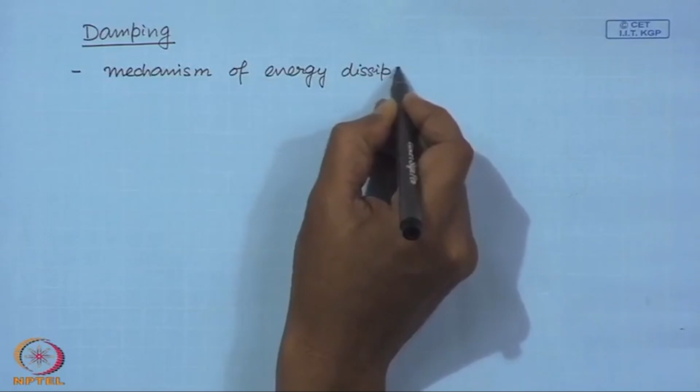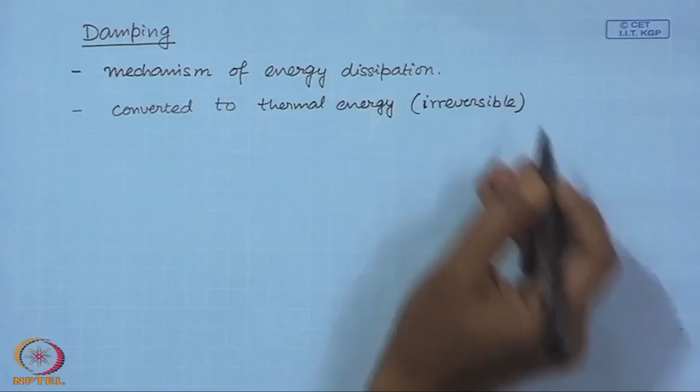So first, this damping is a mechanism of energy dissipation. Now what happens to this energy that is dissipated? It gets converted to thermal energy, and this conversion of mechanical energy to thermal energy in these cases is an irreversible process.

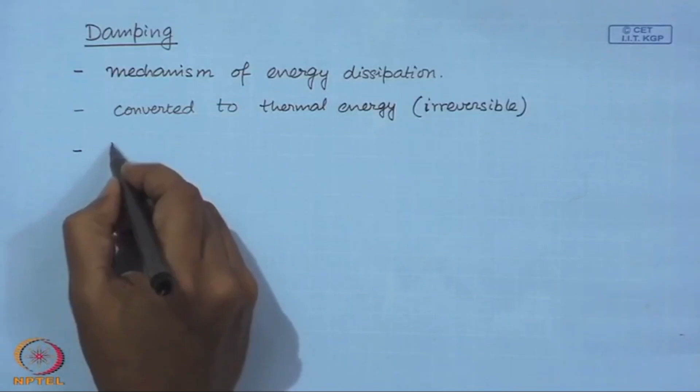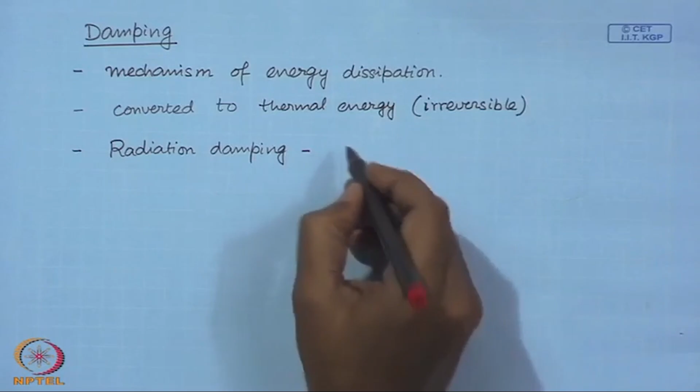Now most of the damping mechanisms work on this, but there is an exception which is known as radiation damping. This damping mechanism, this draining of energy of the structure by radiation damping, takes place not by conversion to thermal energy, but by radiation of the energy in form of sound in the fluid medium in which the structure is placed, for example air or water or any other liquid.

Or sometimes even from the support points of the structure. So wherever the structure is supported, no support is ideal, that means no support is rigid, so there will be some flexibility, and continuously energy gets radiated out at the support points. So we have primarily this energy dissipation by conversion to thermal energy, but there is another mechanism in which it might also be converted or radiated out of the structure.

Now what are the sources of damping? The first is known as internal friction or internal damping. Whenever a structure is vibrating, between the layers of the structure, molecular layers, there is differential straining, these layers have differential motion, and that dissipates energy.

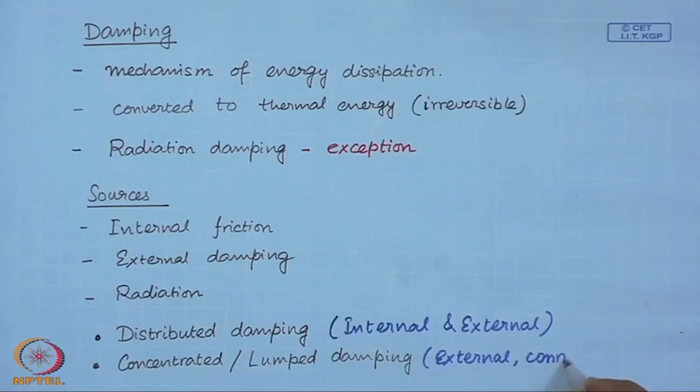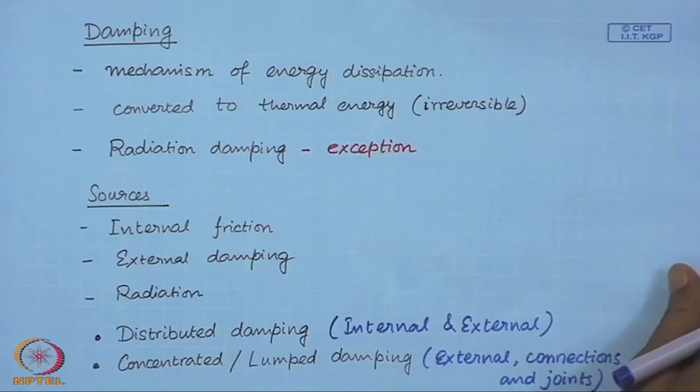So this typically occurs when we have, let us say, a Stockbridge damper in high tension cables. That is a concentrated or lumped damping, which is an external damping, and it can happen at connections and joints, say for example riveted connections, etc. So we have these two kinds of damping. Let us begin with distributed damping.

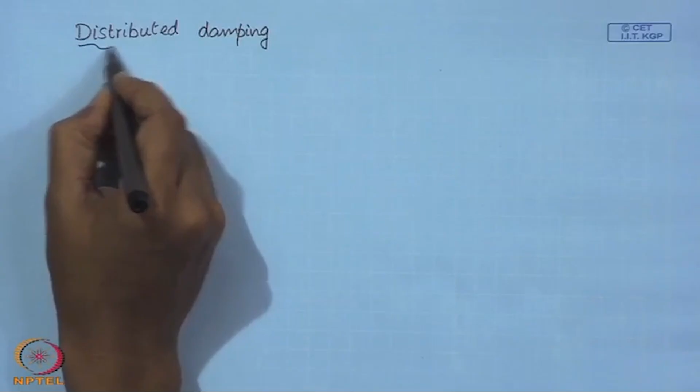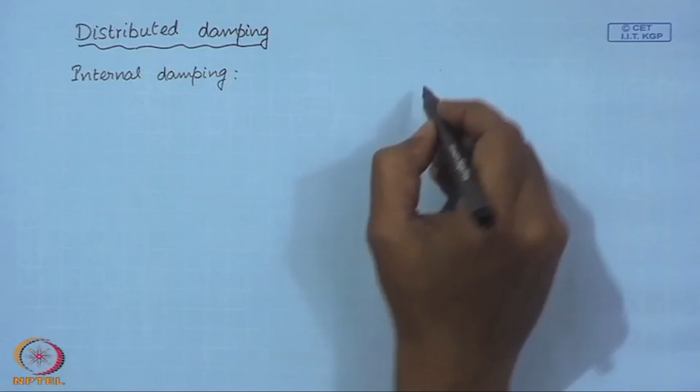So let us try to model this internal distributed damping first. Here we are going to discuss a phenomenological model for internal damping, for example, in a bar, in axial vibration.

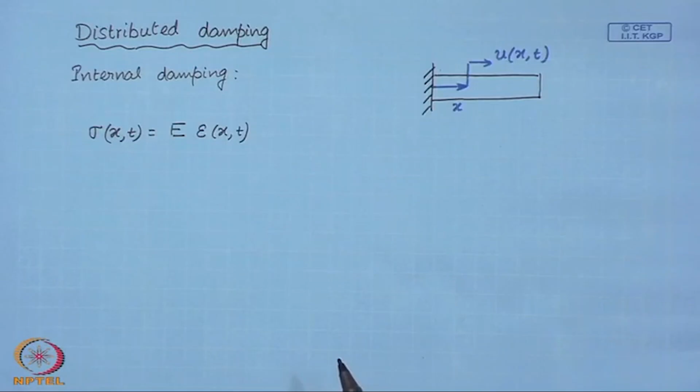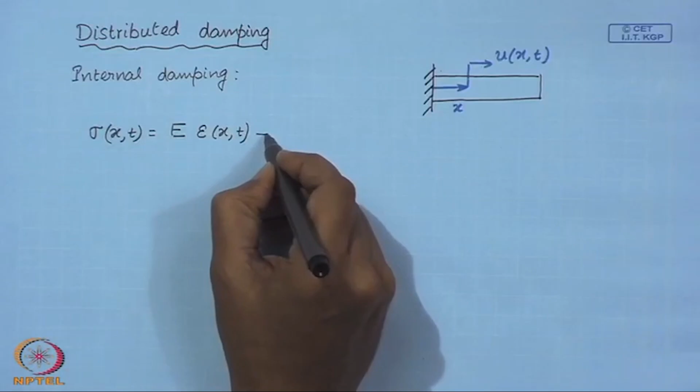Now, when we derived the equation of motion of such a bar, we considered this constitutive relation like this. As I mentioned, in order to model internal damping for a one dimensional system, we must somehow consider the rate at which this straining is taking place. So, we modify our constitutive relation to include the strain rate.

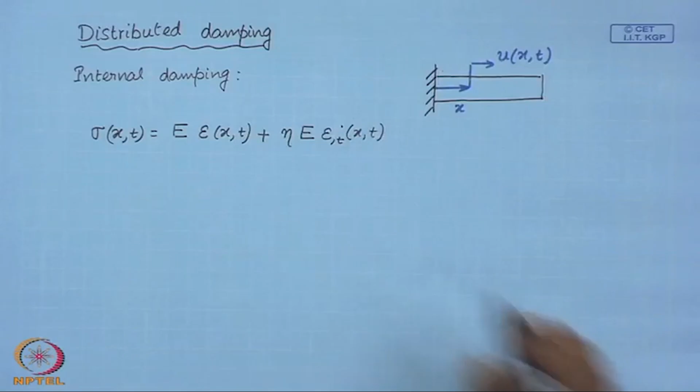Now, this factor is known as the loss factor, and the product of these two terms may be represented as d I, the coefficient of internal damping. So, what we have done is we have introduced in our constitutive relation this additional term, which we will see how this works as internal damping.

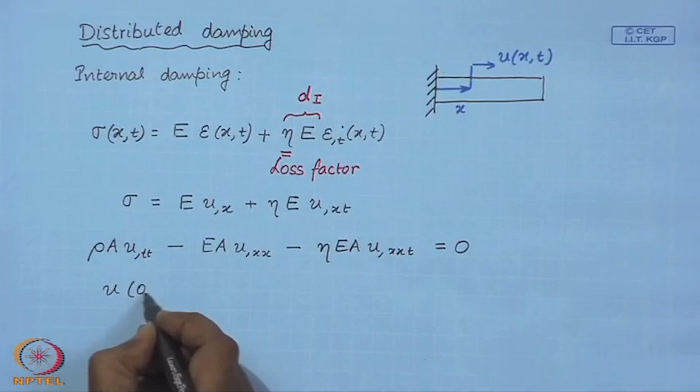So, therefore, our stress is given by this. Now, when we use this to derive the equation of motion as we have done before, we consider uniform cross sectional area. This term, E times del u del x, gives this term, therefore this term will give us, along with the boundary conditions, this.

So this is the damping term. We have obtained this term by introducing this additional strain rate term in our constitutive relation. Now, similarly with external damping, external distributed damping, we have a term like this, and together with internal and external damping, we have this equation of damped vibration of a bar, of a uniform bar.

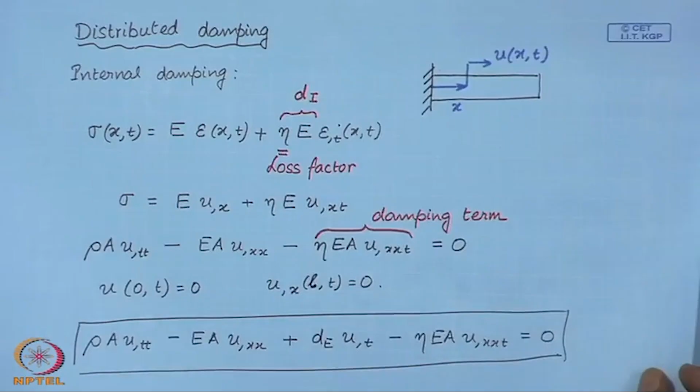Now, this equation may be written in a compact form like this, where this damping operator, this is known as the damping operator, just like this K is known as the stiffness operator.

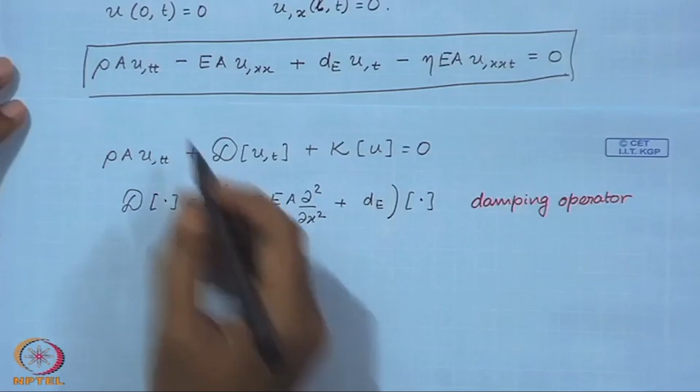Now, let us first see that these terms that we have considered, they indeed lead to dissipation of energy, because as yet we have just introduced these terms and have not checked whether they really lead to dissipation of energy. So, let us start with this equation of motion, and as is the usual way to obtain the energy equation, we multiply this whole equation with the velocity and integrate over the domain of the bar.

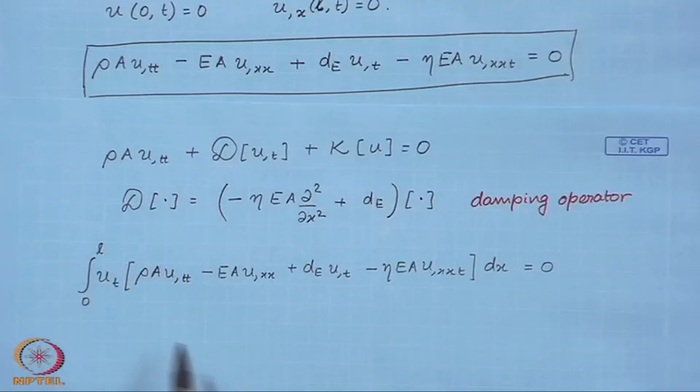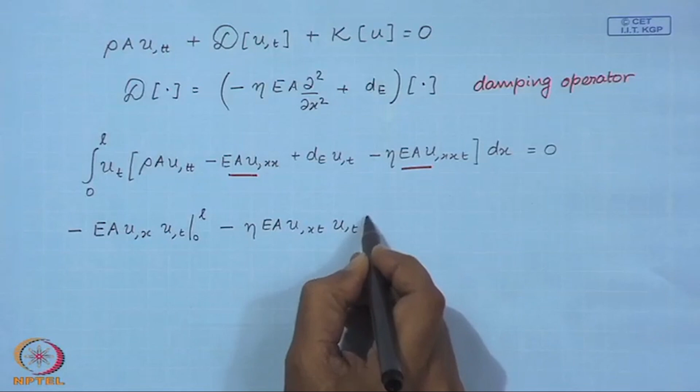And this must be 0. So, multiply by velocity and integrate over the domain of the bar. Now, these two terms I will integrate by parts with respect to the space. So, what I obtain, and this term I can write as can be easily checked. So, this first term can be written like this, and this term.

Now there will be a space derivative of this term, and similarly. Now, if you use the boundary conditions that we have, then these boundary terms drop out, because at x equal to 0 the velocity is 0, at x equal to L there is a force free condition. So this is 0, similarly this is also 0. So, what we are left with is this integral. Here again I can write this term, and I can write this also as a time derivative. The time derivative I have taken out, and I will take the other terms on the right hand side.

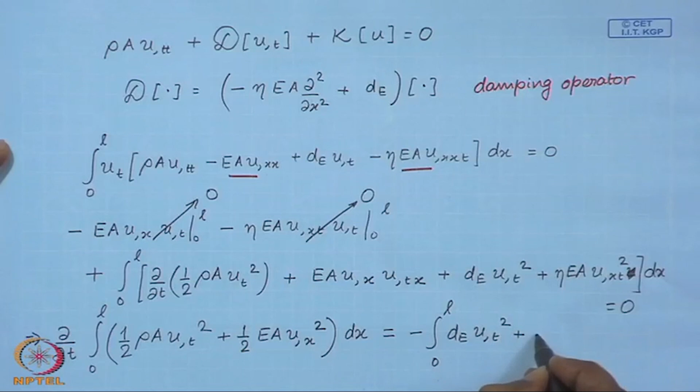So, on the right hand side we have an integral which is always positive provided d E is positive. So, if this d E is positive and eta is positive, then this integral is positive. Here there is a negative sign, so the right hand side is always negative. Which means this is always less than 0 provided d E is greater than 0 and eta is also greater than 0.

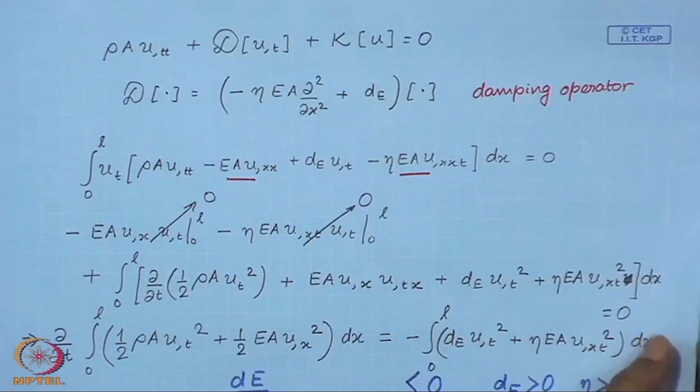Now, this is nothing but the total mechanical energy of the bar. This is the kinetic energy, this is the potential energy, we have already seen these terms. So, the rate of change of energy is always negative, which means energy always dissipates or drains out of the system. The mechanical energy is always dissipated by these damping terms that we have considered, these two terms. So, this shows how the energy dissipates with time.

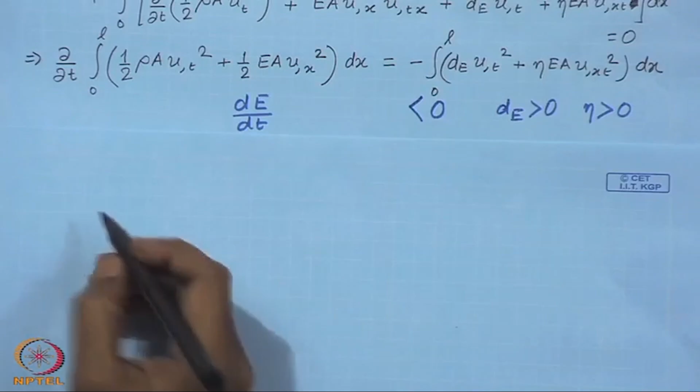Now, if you integrate, suppose you have forcing. In that case this energy equation, I will write as dE/dt, and suppose in addition you have forcing. This additional term would come because of external forcing.

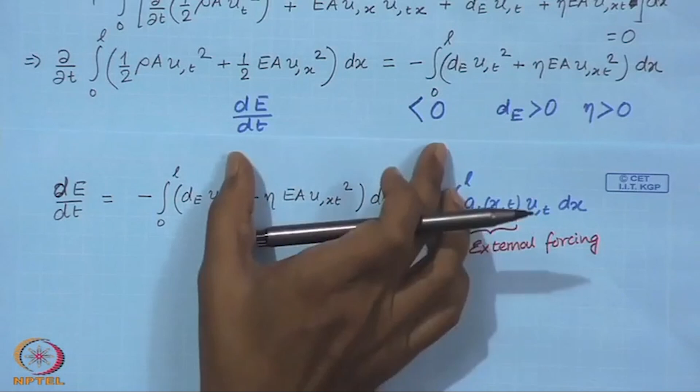Now, suppose this forcing is something like this harmonic forcing that we have considered. We know already, we have discussed this, that there is a steady state solution, and because of this damping, as we have seen here, all the energy of the initial disturbance must dissipate or drain out of the system. So, what we are left with is the steady state solution. Any initial condition, any disturbance created because of an initial condition must dissipate out, as we know from here. So, if we have the harmonic forcing, what will remain at sufficiently large times is the particular solution, which is generated only because of this external forcing.

So from here you can estimate what happens at steady state. At steady state the motion is periodic, therefore if I integrate this energy equation over one period, the change of energy must be 0. So, therefore, I can write this, here I am assuming that this forcing is periodic or harmonic. Now at steady state, if there is a steady state solution, then the energy change over one period must be 0.

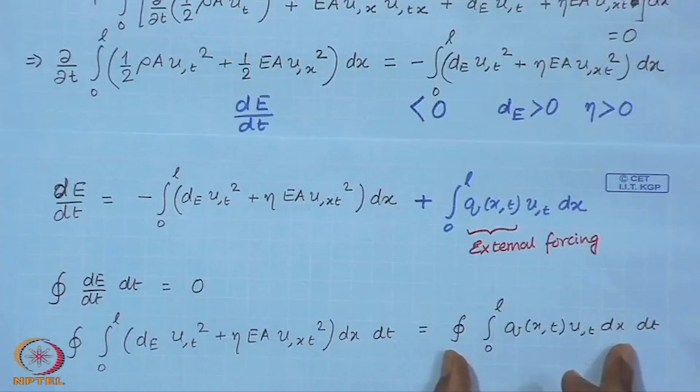Therefore, this is what we obtain. So what this says is the energy provided by the forcing over one cycle is equal to the energy dissipated by the damping terms over one cycle. So from here you can estimate many things, for example, you can estimate the damping.

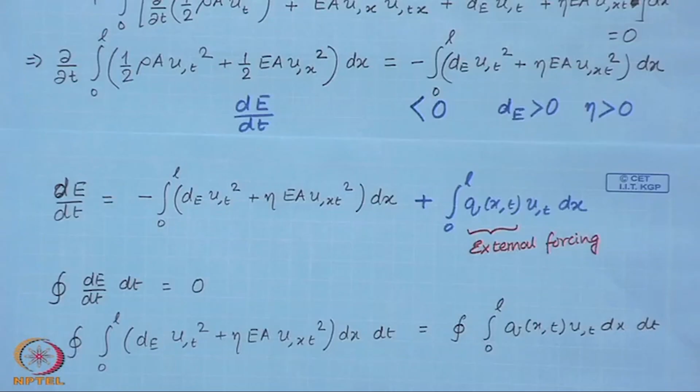Suppose you give a harmonic input and you record the amount of energy that you are supplying over one period, then you know how much energy is being dissipated. So you calculate this term and that will give you an estimate of energy dissipated by the damping mechanism in the system.

So what we have concluded is that any initial condition or any initial disturbance must die out because of these damping terms, and what remains is the steady state solution, and that can be used to estimate the energy that is dissipated, and that can be used to model the internal dissipation, as well as you can estimate the amplitude of motion in certain cases.

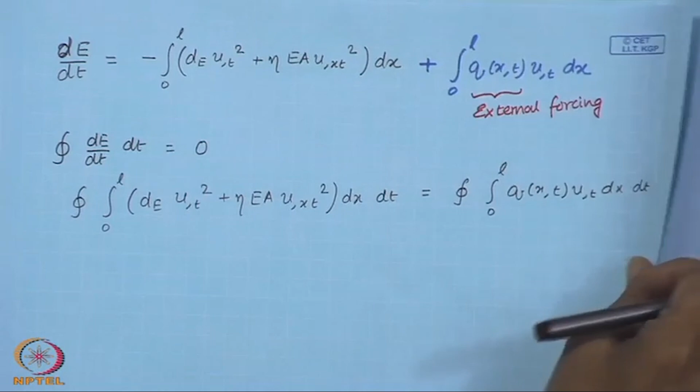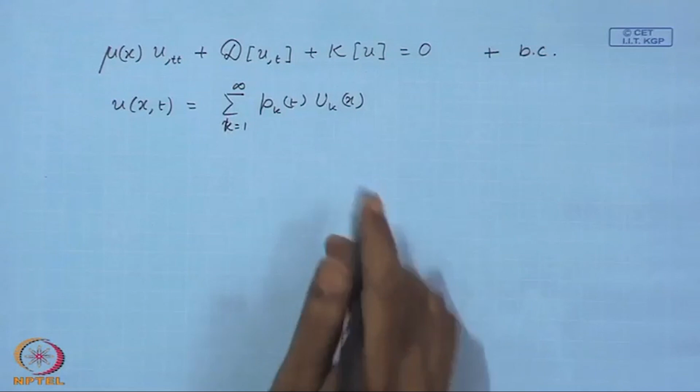Now let us once again look at this damped system with certain boundary conditions. Along with certain boundary conditions, let us try to find out the solution, or let us discretize this system as we have done before using the modal expansion. So these are the eigenfunctions of the undamped eigenvalue problem.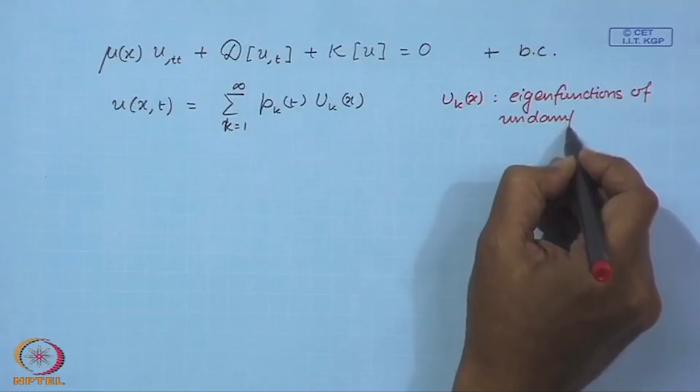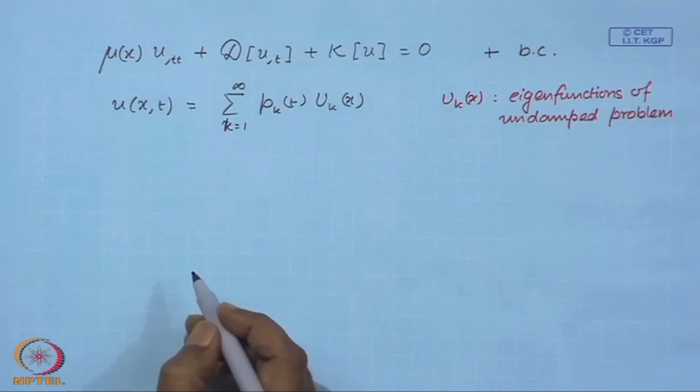So when you substitute here, and finally take inner product with the jth eigenfunction, what we obtain, these steps we have done many times before, so I have directly written the jth, the coefficient of the jth term in the solution.

So I can carry this out for all j and get all the equations governing the jth modal coordinates. Here this d_jk matrix is given by this integral. Now in general there is no guarantee that d_jk is diagonal.

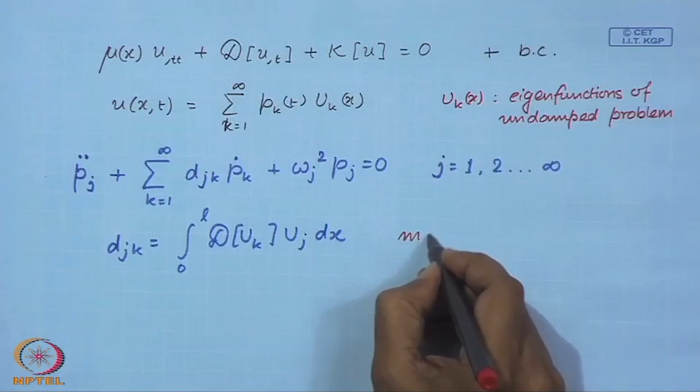Now if this is not diagonal, then all the modes are coupled, so all the modes are coupled through this damping term. Now under very special situations, this damping matrix will be a completely diagonal matrix. So let us look at that condition. That condition follows very easily from here.

If d u_k is some d_k times mu(x) times u_k, so for all eigenfunctions, if the operator operating on this eigenfunction gives this, in other words, u_k is also an eigenfunction of the operator d, the damping operator, then the damping matrix is completely diagonal, as you can see from here.

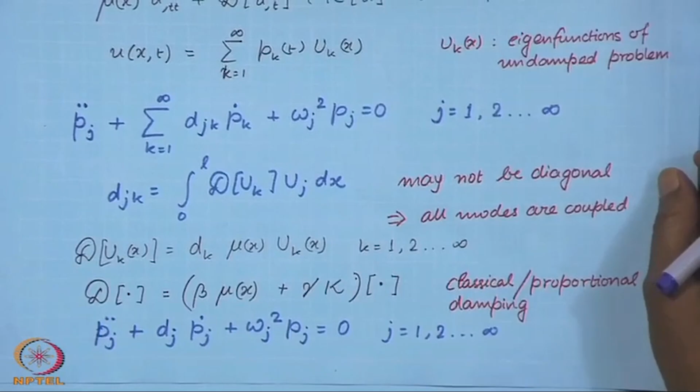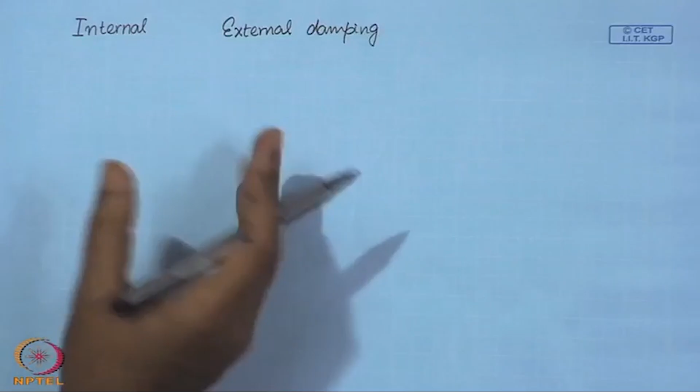Now we have looked at internal and external damping. Let us delineate the roles of these internal and external damping terms, let us see how they are actually a little different. So for this let us consider, we are going to look at the difference in roles of this internal and external damping.

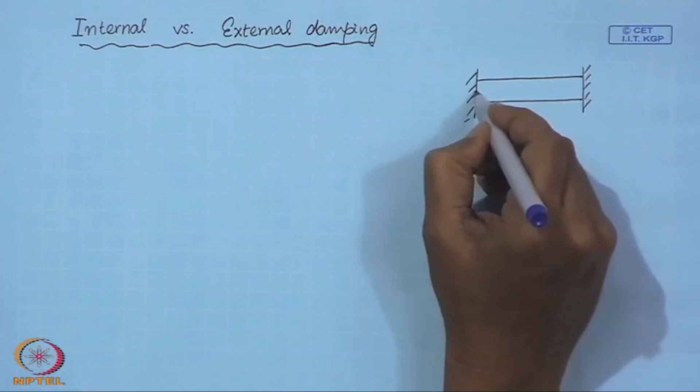So to understand this, let us consider this simple example of a fixed bar in axial vibration.

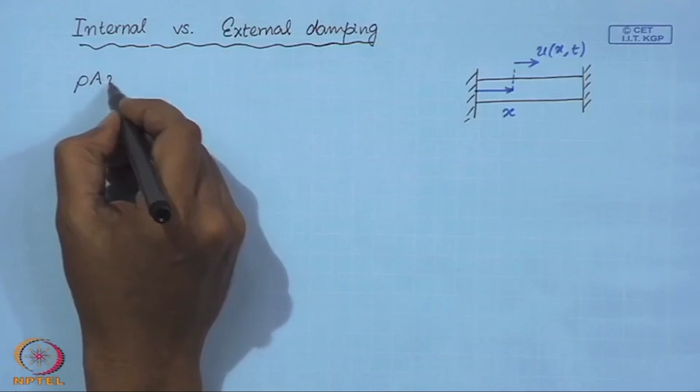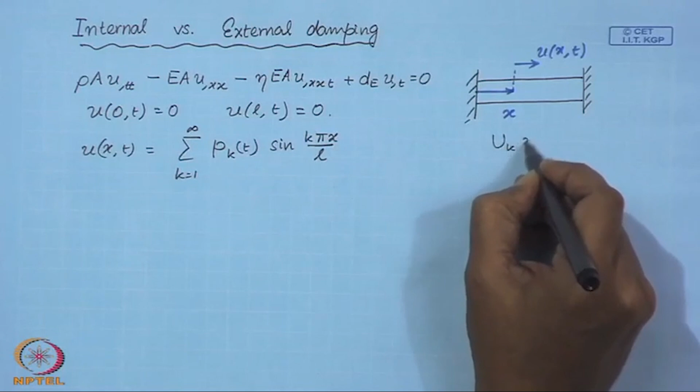So, the equation of motion is this. The boundary conditions are given by this. So, therefore, I can expand, as you know that these are the eigenfunctions of this fixed bar.

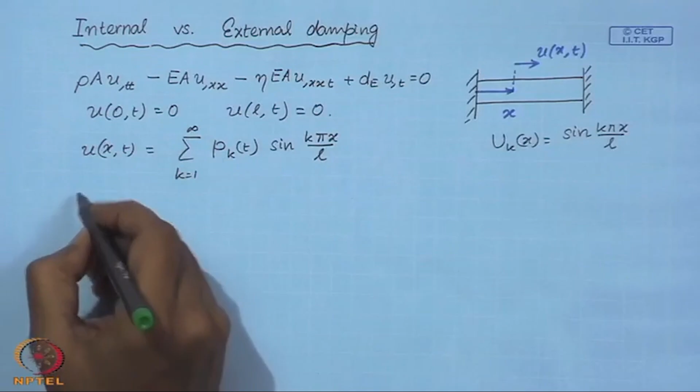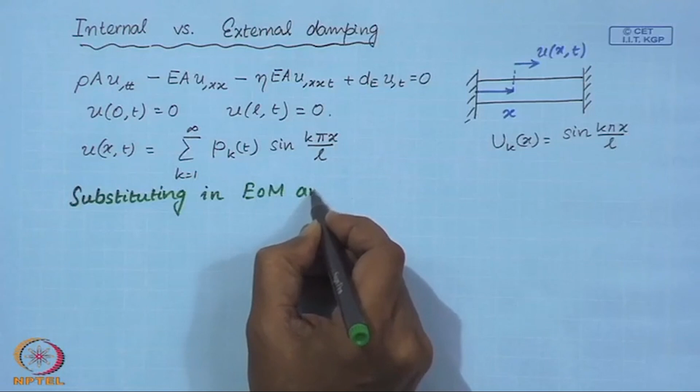So, when you substitute this expansion and take inner product with sin k pi x over L, that filters out the kth coefficient in the expansion. So, what we are going to get: this term is for the external damping, this term is for the internal damping. So, this is what we are going to get.

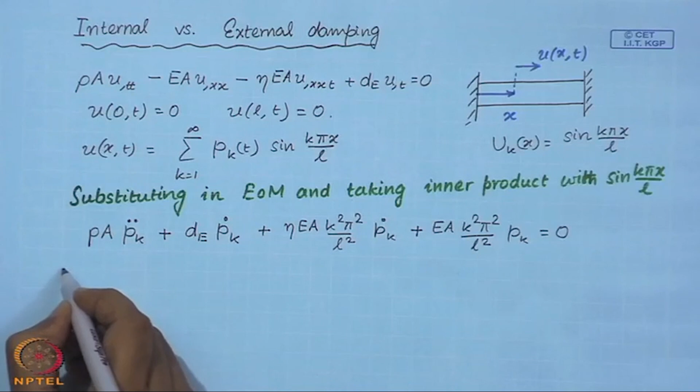Now, let us look at this equation one by one. Suppose there is no internal damping, so when we have only external damping, I can write this as, which can be written as, and if you compare, then zeta k can be written as this. So, you see that this k appears in the denominator of this damping factor.

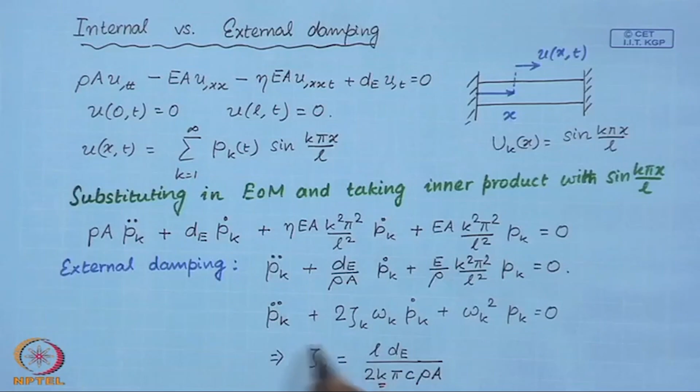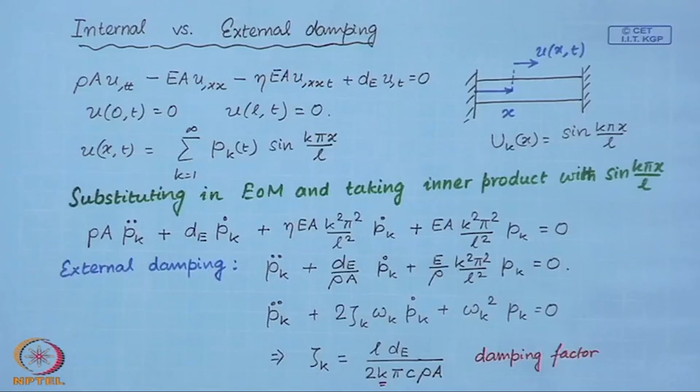Which means that for high values of k, this damping factor is actually very low, which tells us that external damping is inefficient in damping out higher modes. So, higher modes are damped less compared to the lower modes. We will look at the reason for this.

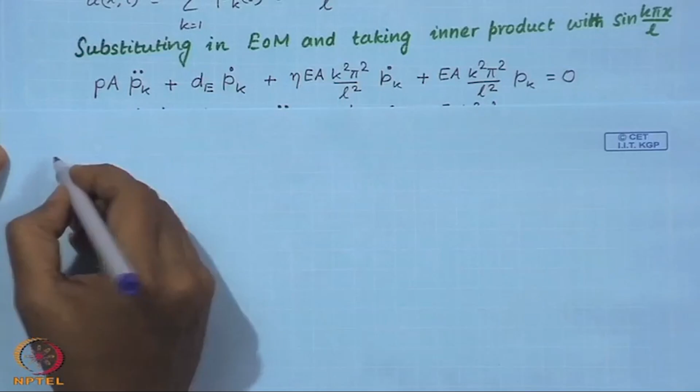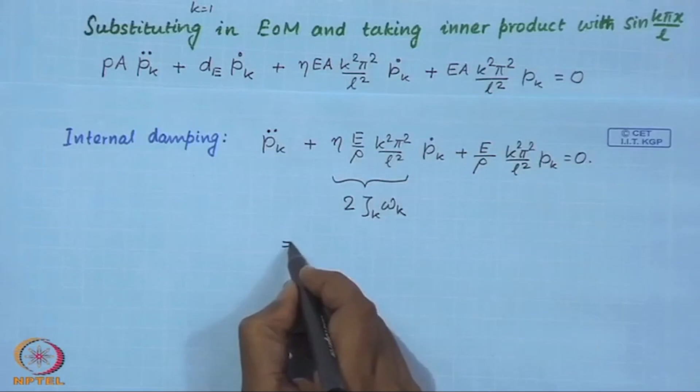Now, let us consider the internal damping case. So in that case I can write, and once again if you represent this term as 2 zeta k omega k, then you see that k appears in the numerator. Therefore, for higher modes, higher values of k, zeta k is high, goes higher. So, which means higher modes have better damping because of internal dissipation.

So, internal damping is more effective for higher modes, while external damping is more effective for lower modes. So, external damping is effective for lower modes, while internal damping is effective for higher modes.

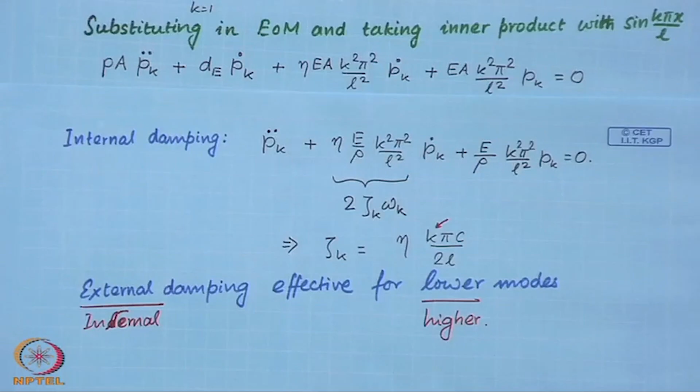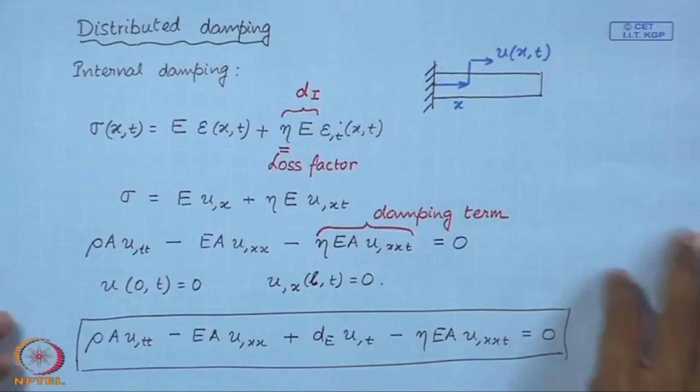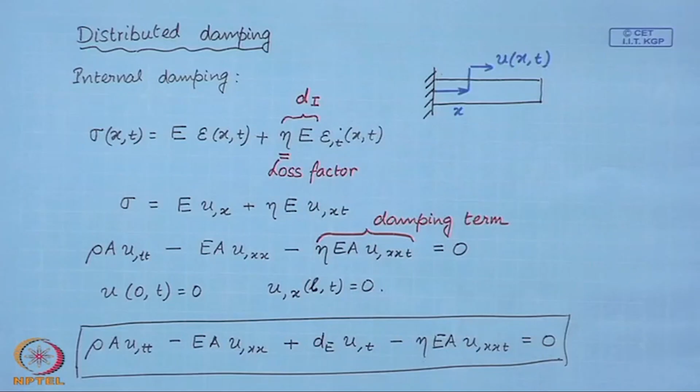Now, to understand this, you have to look at the expression of, say for example, the internal damping. We have seen already that this internal damping, the way we have introduced it, is strain rate dependent, dependent on rate of change of strain. Now, as you go to higher modes and if you consider the solution, then del u del x, so rate of change of del u del x with time. So if you see, this solution is, say for example, for this bar.

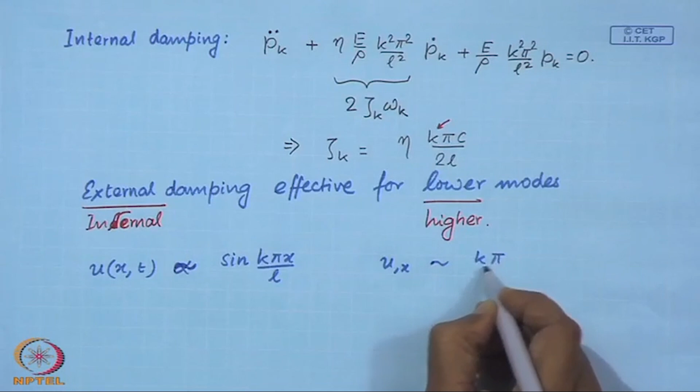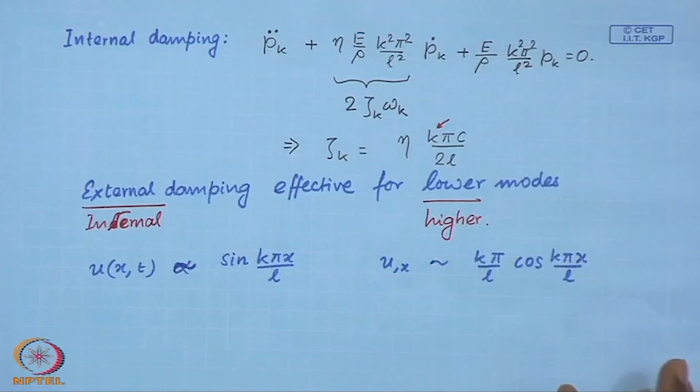So, you have terms in the expansion of u like this. So del u del x, so higher the value of k, higher is the contribution from this strain term, the strain rate term. So for this reason, higher the mode, higher will be the effectiveness of the internal damping.

On the other hand, if you consider this external damping, if you look at, say for example, the first mode: the first mode of the bar or the string looks like this, the second mode looks like this, the third mode looks like this. So higher the mode, more will be the nodes, and therefore the effective motion of the system in the ambient fluid will be lesser and lesser. So, the effective damping because of external damping reduces as you go to higher modes.

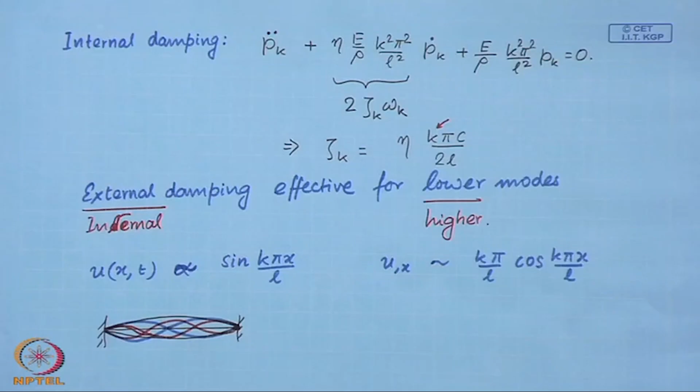Now, let us look at discrete damping. As I have already mentioned, this discrete damping occurs when we attach, for example, an external dashpot to a continuous system at a particular point. Say for example, a Stockbridge damper is typically used in high tension cables. That is attached to a particular point on the cable, and that damps the vibrational energy of the high tension cables. So this is a discrete damping or a lumped damping. Other than that, you can have lump damping when you have connections or joints.

Say for example, you have riveted connections between two structural elements. In that case, damping is localized at the connection or at the joint. So for such cases, what you have is discrete damping. So, let us look at an example.

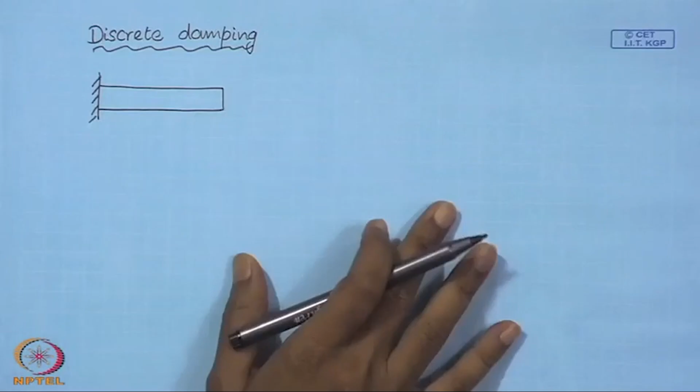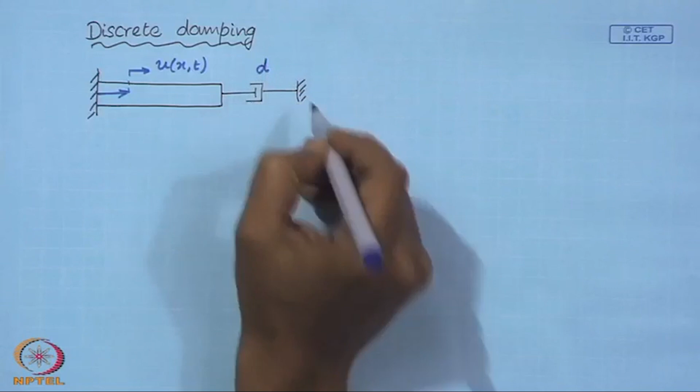So, this is a bar in axial motion, and here we have a dashpot attached to this end of the bar. So, I can write the boundary conditions of this problem. So, this is a fixed end, and at this end I have the force because of this damper.

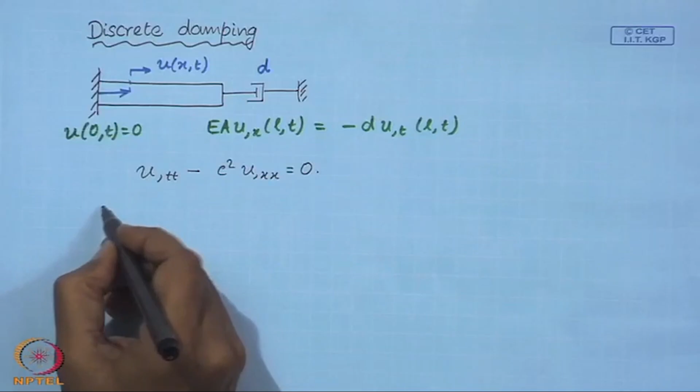The equation of motion is like this. Let us search a solution of the form like this. So, we have a discrete damper at this end, and we have introduced this damping not in the equation, but in the boundary condition, which we can always do. Now, once you substitute this solution form in the equation of motion, we obtain an eigenvalue problem.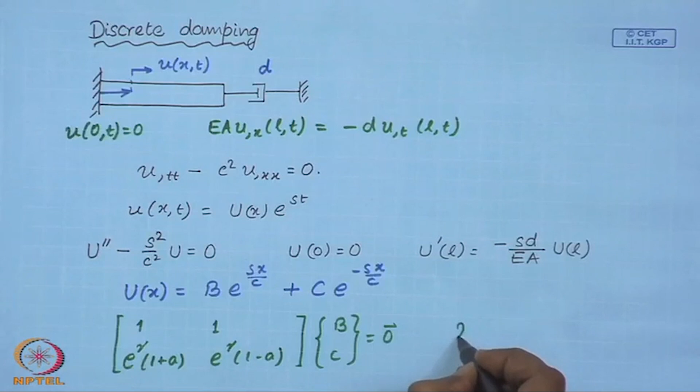You obtain this eigenvalue problem, and the solution of this eigenvalue problem can be written in this form. And when we use the boundary conditions, these two boundary conditions can be written in this form, where gamma is S times L over C, and this A here...

This small c is of course the speed of axial waves in the bar. So we have to solve this system. The solution for non-trivial solutions of B and C, the determinant of this matrix must be 0, which leads us to...

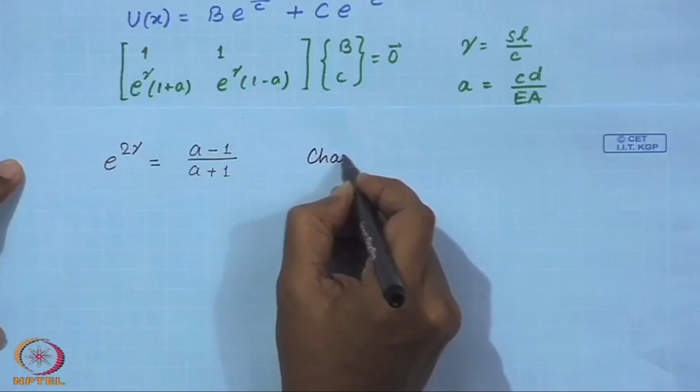As you can easily find out, this is the characteristic equation, which can be solved for gamma when a is not equal to 1. When a is equal to 1, there is a special case, so this can be solved when a is not equal to 1.

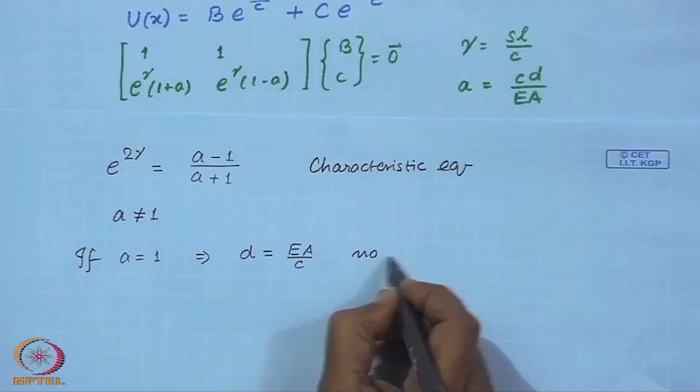If a is equal to 1, which implies that the damping, the adjustable parameter, is tuned to this value, there are no eigenvalues for this problem.

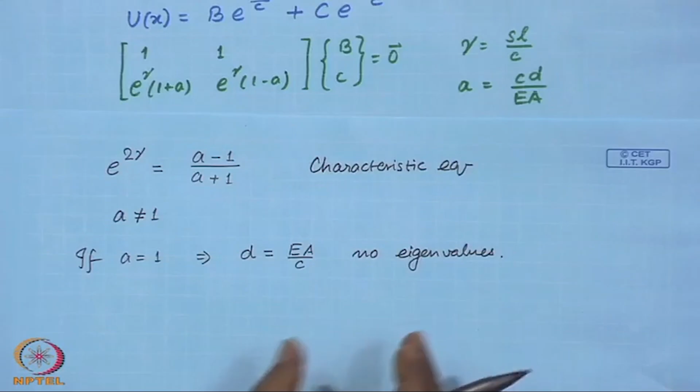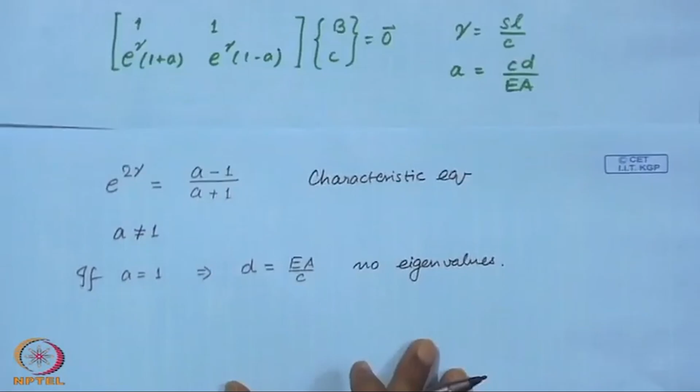No eigenvalues would imply there are no solutions. But then we have considered solutions of this very special form, so there are no solutions of this special form, but there are solutions which we have to understand in terms of wave propagation. That we will keep for a later discussion.

Right now, let us solve when a is not equal to 1, and for solving that we can consider gamma to be a complex number of this form, alpha plus i beta. Alpha can be easily solved as log natural of... and beta is indexed now, the phase...

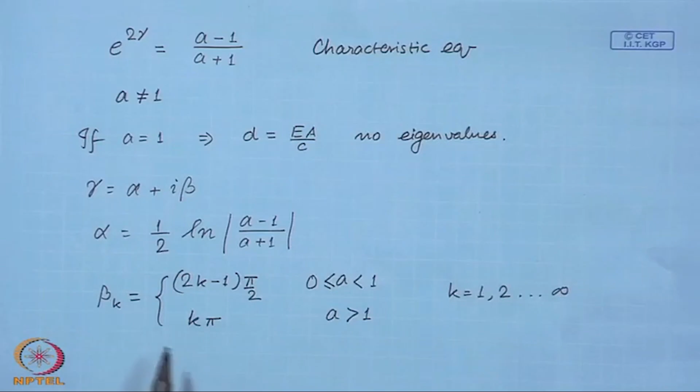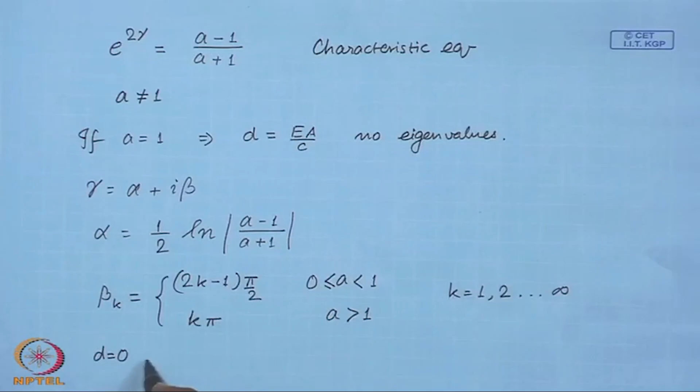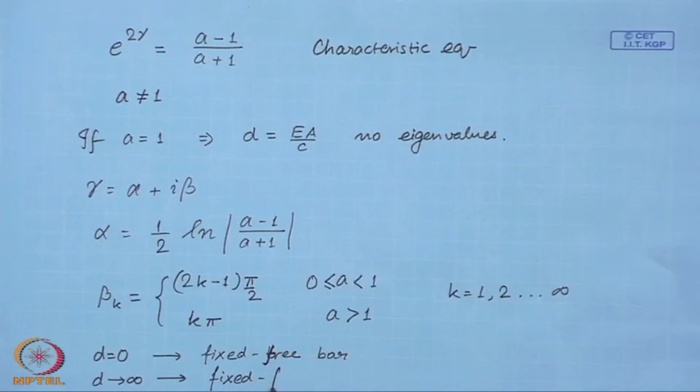There are infinitely many values of beta which are now indexed with k, and for various ranges of values of a we have these solutions. You can check if you put d as 0, then you get the eigenvalues of a fixed-free bar. And if you put d as infinity, then it is a fixed-fixed bar. That can be checked from these solutions of gamma that we have obtained.

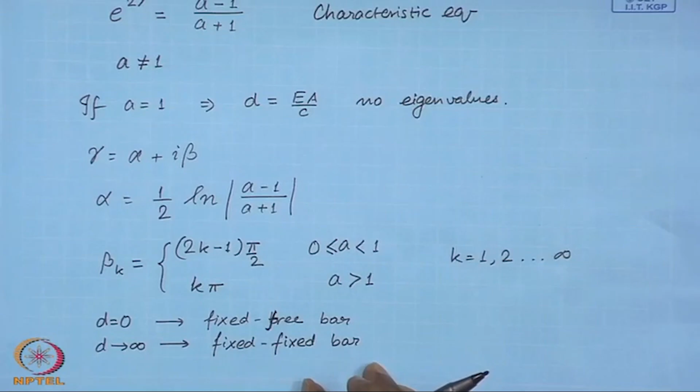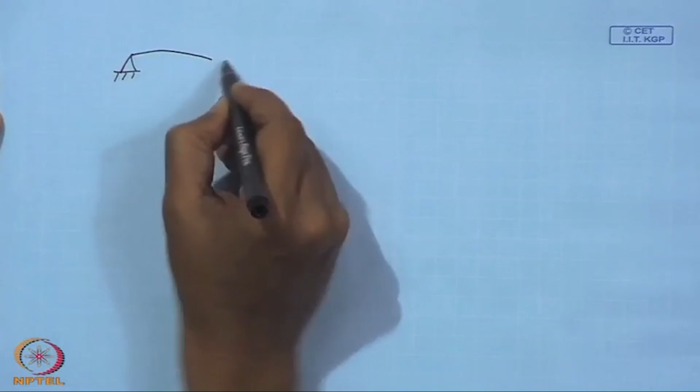Let us look at another example of a string with a concentrated damper or a lumped damper at x equal to a. In this case you can write down the equation in this form, and if you use the modal expansion...

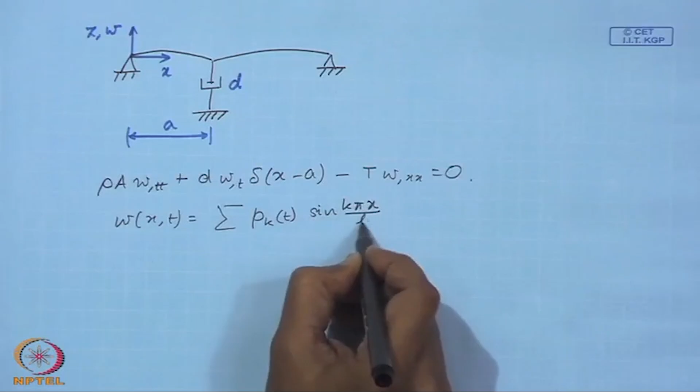Substitute in the equation and take inner product with the jth eigenfunction, you obtain this.

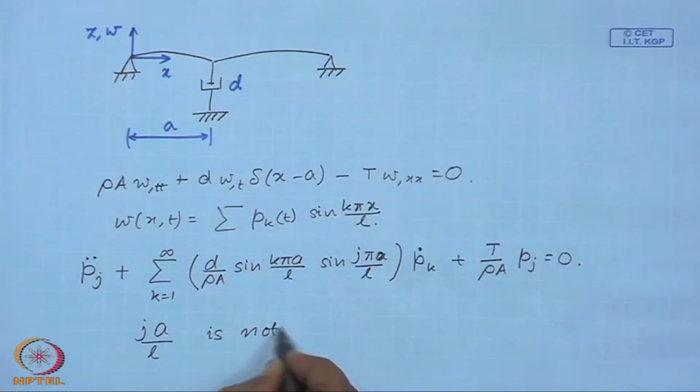Now, if you consider that this j times a over L is not an integer, so if you can adjust this a such that this is not an integer for all j, then you will find that all modes are damped, whereas if this does not happen, then some of the modes will not be damped. For this situation, when this is not an integer, this is known as pervasive damping.

So when the damping is pervasive, all modes will be damped, whereas if you put this damper at the middle of the string, you will find that the second mode is never damped. So the second mode, the fourth mode, these modes will not be damped. So the damping is then non-pervasive.

So in today's lecture what we have studied is this: we have introduced the damping and we have seen two forms of damping, internal and external. We have studied distributed damping and lumped or concentrated damping, and we have delineated the effects of internal and external damping. So with that we conclude this lecture.